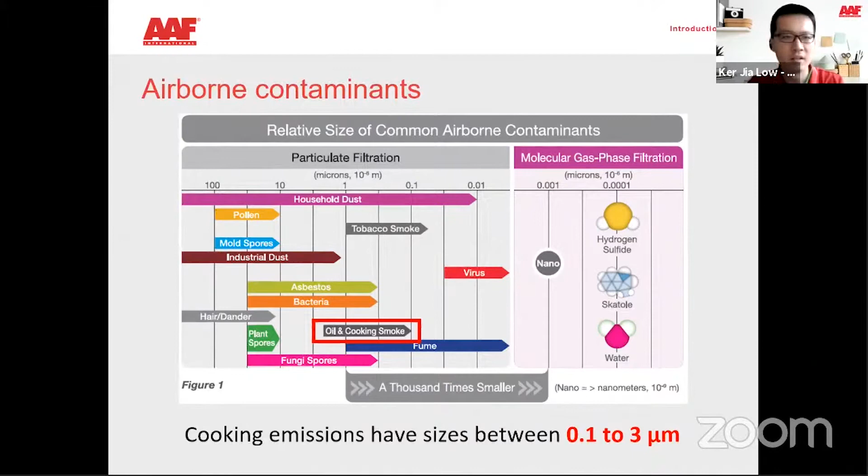So the first thing we want to know about cooking emissions: are cooking emissions harmful? So we can go to the next slide. It is about airborne contaminants. So from here you can see oil and cooking smoke is under a particulate filtration side, and it has a particle size around 0.1 to 3 micrometers. So how will it affect our health? If we look at the WHO guidelines, it says that with a particle size of 0.1 to 3, it is small enough to penetrate deep into the alveoli. Which means it may be able to go into our blood as well, which is harmful to our lungs.

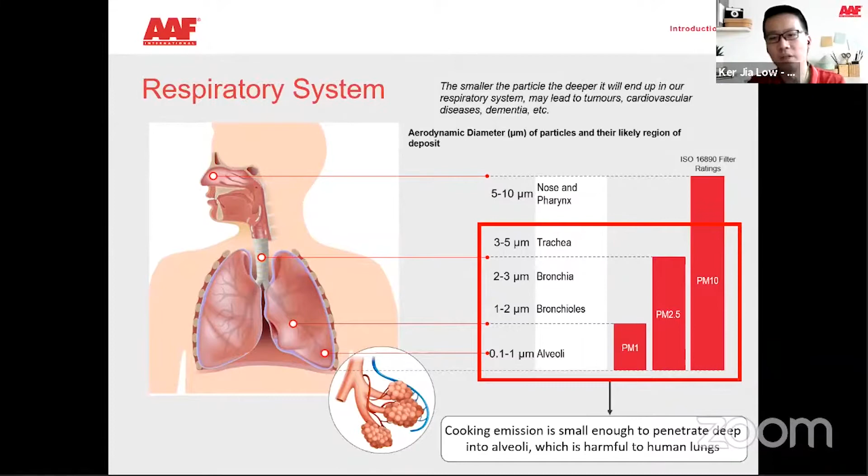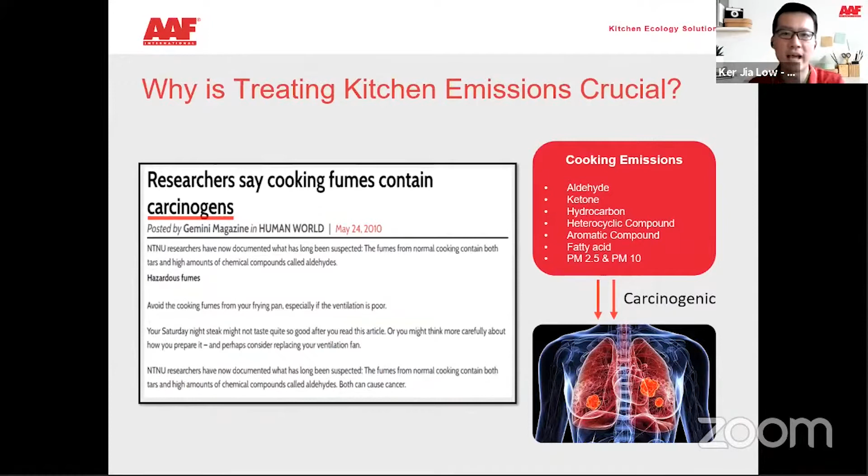And some researchers even say that cooking fume contains carcinogens. This is research done by the NTNU. It's documented that cooking fume normally contains both tar and a high amount of a chemical compound called aldehyde. This kind of chemical contains carcinogens, which means it can easily cause us to have cancer.

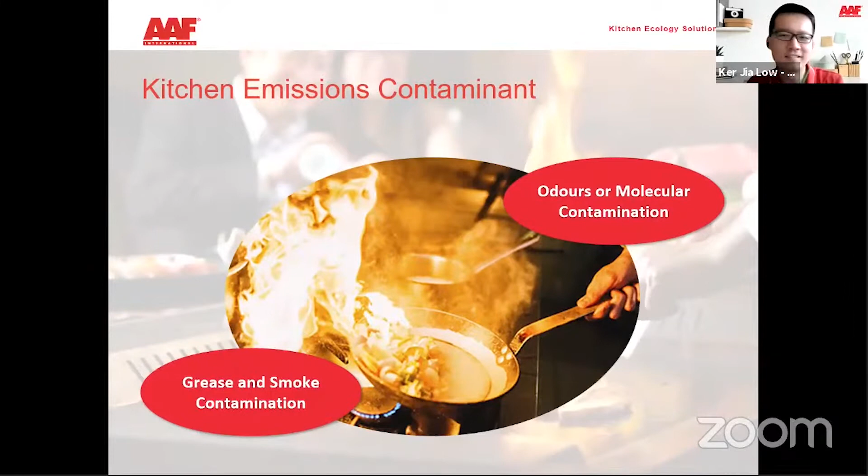So what is the cooking emission contaminant? Basically, kitchen emission contaminants can be separated into 2 categories. The first one is odor, or molecular contamination. The second one is oil grease or smoke contamination. So what do these 2 contaminants affect? The first one is the oil stain. You can see this is a sample of exhaust directly out from the kitchen, so it will leave some oil stain on your wall. This definitely will affect the appearance of the buildings. And if you are using this type of exhaust fan, due to the oil stain on the exhaust fan, it will also affect the lifespan as well.

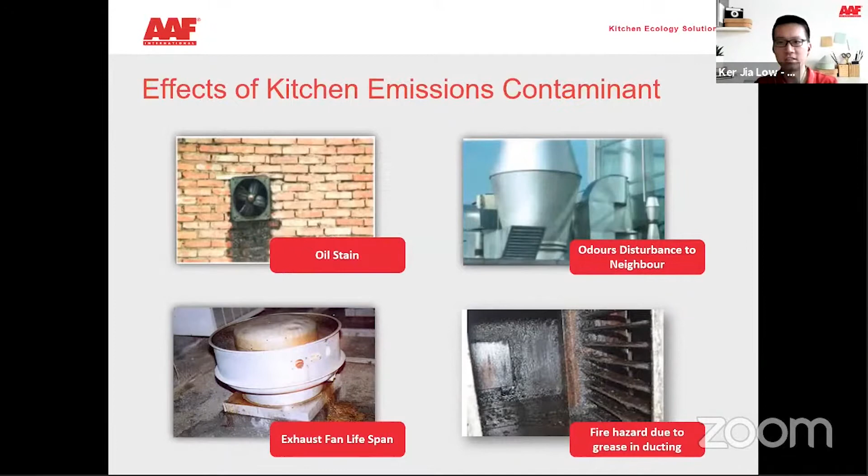So how about the odor? Let's say the kitchen is near a residential area, so definitely it will bring some disturbance to the neighbors as well. So it is also quite important to eliminate it. And of course, the last one is the fire hazard. If we don't have any step to trap the oil mist, your exhaust duct will be full of waste, and this can easily get burned if any fire happens. So fire hazard is also a reason why we should take care of kitchen emission contaminants. So there is a case study of a fire hazard in a kitchen.

So saying that any substance associated with grease will first ignite in half of the cooking fires that begin with cooking material. You can get more information from the NFPA. Over here they also mark their concerns on the grease that's staying in our ducting or even in the kitchen.

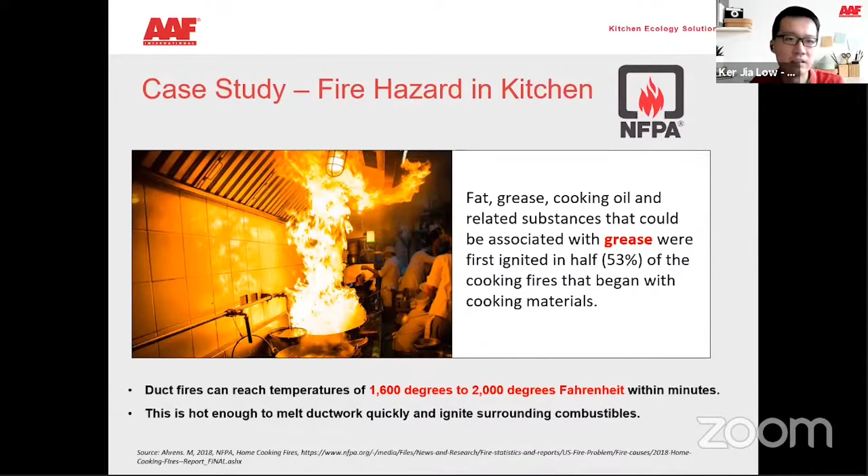Okay. So some of us will say most of the time, like even in fast food or some restaurants, our kitchen already installs a mechanical grease filter. So doesn't it help? This is another study that has been carried out and recorded in the ASHRAE Journal. According to the study, the efficiency of mechanical grease filters in filtering grease is from 5% to 70%.

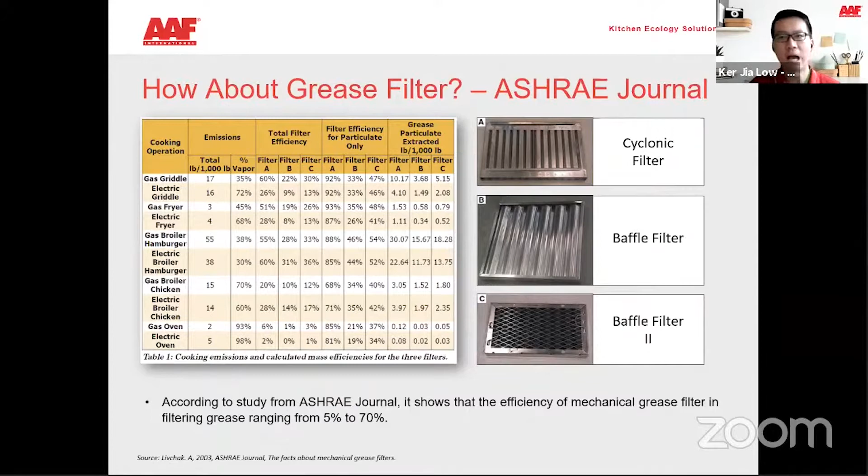So you can imagine a lot of these, they claim cyclonic filters, baffle filters, are around 90% or more than 95%. But because they are placed too near to our kitchen stove, it's not efficient enough to trap all the vapor generated during cooking, like the oil, because if the temperature is so high, it can't be trapped by the mechanical grease filter because it's still in the vapor stage.

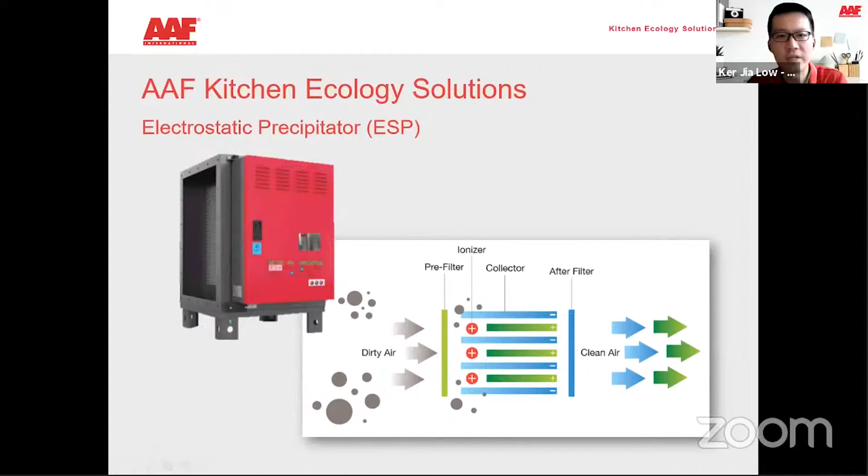Over here, the ionizer will ionize all the oil particles. It will charge them, and then they will be collected by the collector. After this, only clean air comes out. This concept basically uses electrostatics to charge up the oil film and make it easily attracted to the collector.

Okay, so in AAF, we have two models used for grease and smoke removal. The first one is the Q series, we call it MAM ESP Q series. The Q series normally targets small scale restaurants. It is more compact, the average air velocity is 5 meters per second, and the oil removal efficiency is 90%. It's not a modular design. We have targeted various airflows, so according to your airflow, we'll provide you a different model. So this is the Q series model.

Another one is the E1 series model, normally targeted for hotels and shopping malls. This is a modular design, so we are able to cater to higher airflow. Let's say we have 30E1 series, which caters 3000 cmh of airflow. If you have 6000 cmh, we can use two 30E1 series to cater your 6000 cmh. This is what we call modular design, and later we will show more about it.

The air velocity will be from 2 to 2.5 meters per second to 3.5 meters per second. This is because most consultant designs, or tender specs, prefer an air velocity of roughly 2.5 meters per second. That's why the E1 series is more suitable for your tender projects or consultant designs. The efficiency is also higher than the Q series; the oil removal efficiency can go up to 95%.

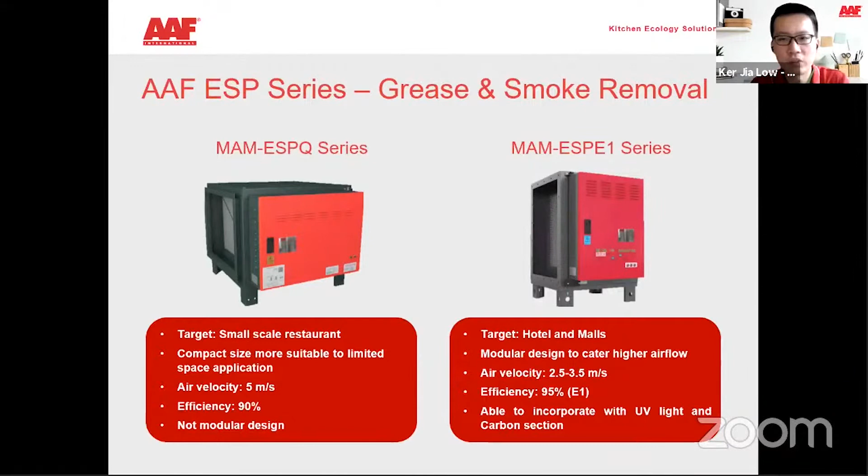So we go to the ESP configuration next. Normally we call this one a single pass. For this ESP configuration, we will focus more on the E1 series. For example, right now your target airflow is 3000 cmh. If you just want to target 3000 cmh, you can definitely use a 30E1 series.

Let's say, for example, you're targeting a 6000 cmh airflow. You can stack 2 units of 30E1 series together. But if you're using these 2 units stacked vertically, the efficiency actually remains unchanged, still 95%, but with a higher airflow. So if you want to increase your efficiency, you can consider what we call double

pass ESP configurations. This double pass ESP configuration will increase the resistance of the ESP itself, but it will improve the efficiency from 95% up to 99.75%. So this configuration is actually quite good and is recommended if

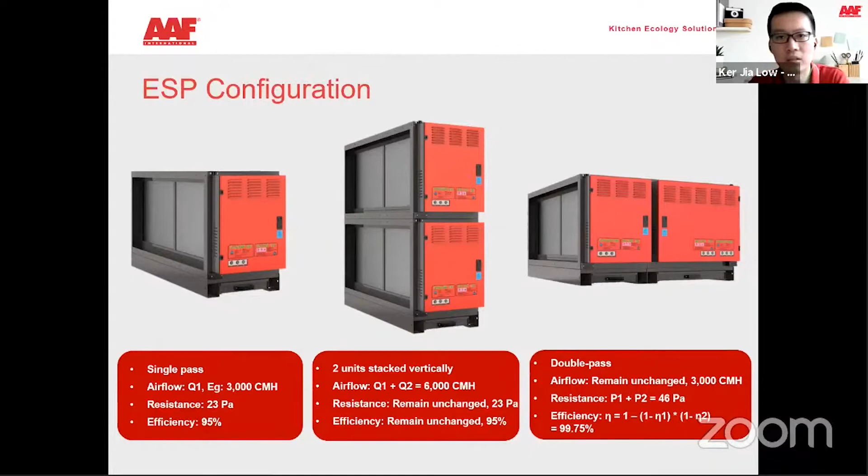you are targeting a fast food chain, for example McDonald's or Burger King, because this type of fast food chain generates a lot of oil smoke or oil fumes. So 99.75% is a good one to prevent any oil emissions or fume emissions going to your pedestrian street or outside your building, leaving oil stains and all these kinds of things.

Okay. So the next one we will go to is odor removal. If you still remember the kitchen emissions, we face 2 contaminants. The first one is the smoke and oil film. The second one is the odor. So if you need to remove the odor from your kitchen emissions, you might consider the E1 series incorporated with the UV series or CB series.

So right now we are going into the UV series first. The UV series also has a modular design with the E1 series, so it can incorporate with the ESP E1 series. It has an odor removal of more than 90%. So how does it actually remove the odor? The first thing is it generates ozone.

This ozone is a non-flammable gas. It requires 2 to 3 seconds of contact time to react with the odor that is released, so that it can remove the odor generated during your cooking stage. So this is one way of odor removal, the UV series. Typically people prefer the UV series more than the carbon series.

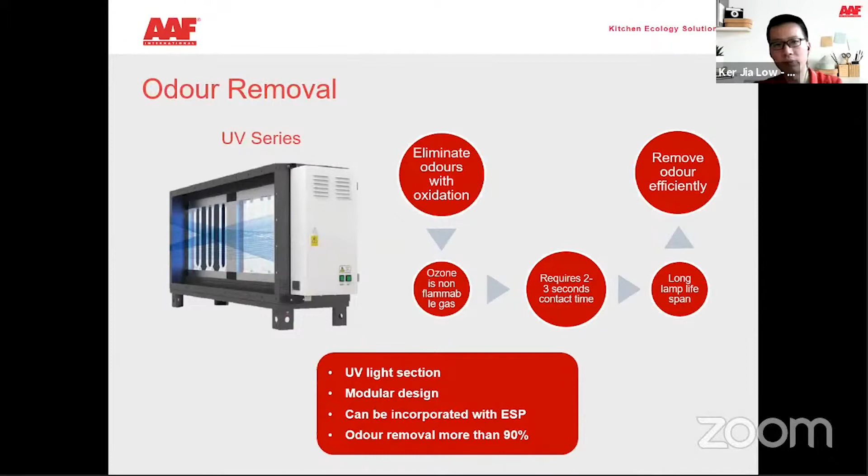The main reason is if we are using a 95% oil film removal rate, there will still be a possible 5% of oil film released into the environment. So if we are using carbon behind the E1 series ESP, that 5% of the oil film will easily stick on the carbon. So it will increase the carbon pressure drop dramatically and also reduce the carbon lifespan.

So now we're going into the carbon series. This is the carbon series we talked about just now, the activated carbon sections. Inside is a carbon pellet filled with activated carbon. It's the same as the UV series: it's a modular design, and it can also incorporate with the ESP series. The odor removal rate is also around 90%.

But the problem is, like I said just now, if you are going to use a carbon series to remove the odor, the first thing you must be very careful about is the oil removal efficiency. So instead of using 95%, maybe what you need is a double pass, to increase the oil removal efficiency to around 99%, so that this will prolong your carbon series lifespan.

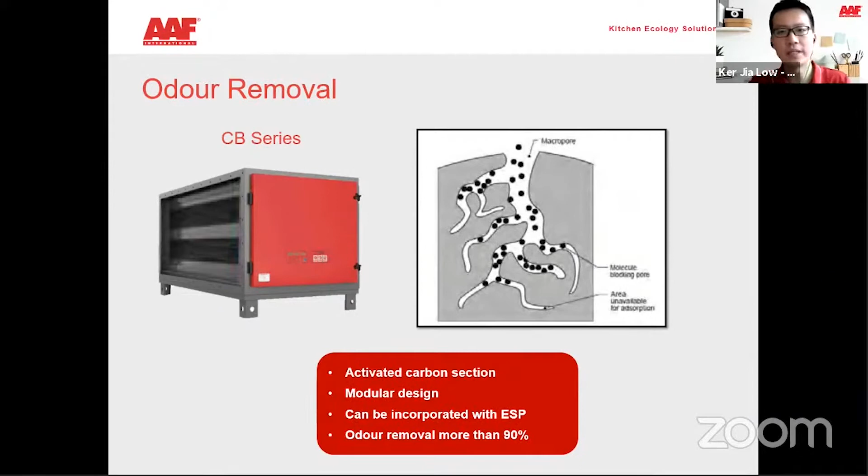So we can go to the next one. The next one is the AAF Kitchen Ecology Solutions. This is basically how it's going to be installed at site. The first stage is the oil remover; the first stage, I would say, is the pre-filter.

The pre-filter is a kind of mechanical filter that we saw just now. Normally this one can be installed at your kitchen hood, or you can also install it just before the ESP. It's a grease, oil, and moisture separator. The second and the third stage will be an electrostatic precipitator.

Q series or E1 series depends on your application. Double pass is optional. If you are considering using a carbon filter, I would definitely suggest the double pass configuration, because this ensures only limited oil film passes through the ESP and sticks on your activated carbon.

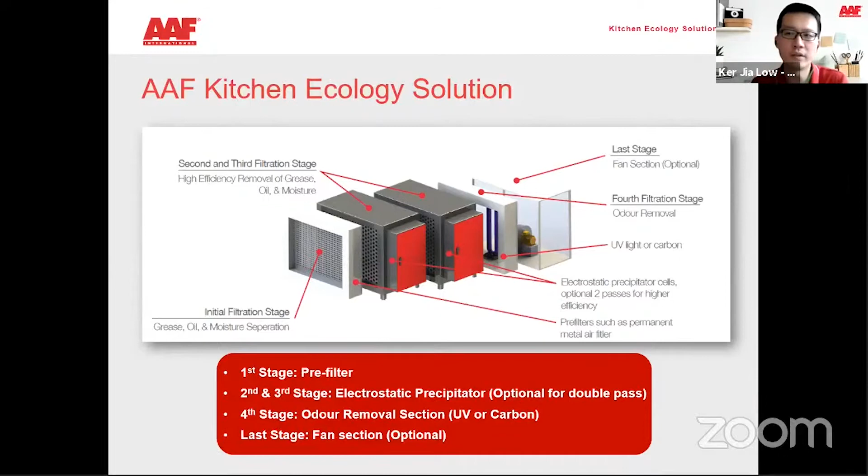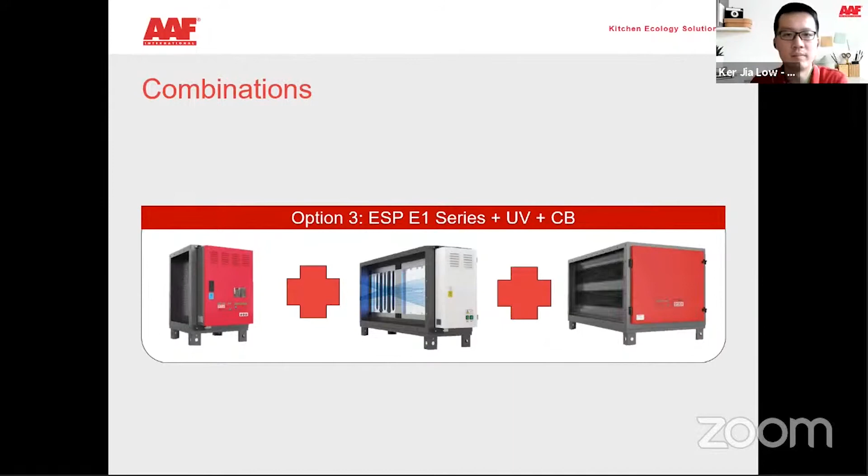So what combination can be useful for the E1 series? If you are more concerned about UV for odor removal, what you can do is put an E1 series ESP in front, then add a UV, and then add on a carbon series. This combination can have quite efficient odor removal efficiency.

The second combination is another product. Just now we said it's Q series, E1 series. This is another series for a more economical way to do it - the E1C series, where C stands for combination. By using this E1 combination series, it already includes a UV inside and carbon as an optional.

This one is also the same - we normally target it for hotels and malls, most probably for consultant design and tender spec, 2.5 to 3.5 meters per second. The efficiency for oil film removal or oil mist removal is around 95%. It's built in with UV light already, and carbon as an optional - you can choose either a honeycomb carbon, a carbon tray, or MAC carbon, which is kind of like a pleated filter.

So we already know the spec or model that AAF provides. ESP Q series is most probably for small scale restaurants. E1 series is for tender spec, and E1C series is also for tender spec. The difference between E1 and E1C series is that E1C series is a combination - one unit already includes a UV and a slot for us to put in a carbon filter.

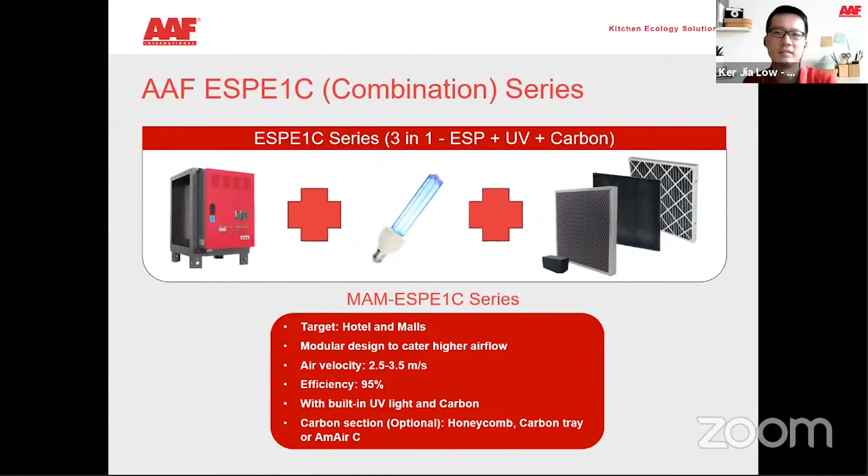Other than that, AAF ESP products have compliance to ASHRAE and EN. For ASHRAE, we tested it by ASHRAE 52.2, and for EN 779, we also tested it under EN 779 particle test. It has a 95% efficiency at 500 FPM, that means the speed. You can refer to the diagram over here.

This is for the resistance and this is for the efficiency. For the line, you see 500 FPM is around here, so it's around 95%. If you still remember, we said it's 0.1 to 3 micrometers, so the efficiency is around 95%.

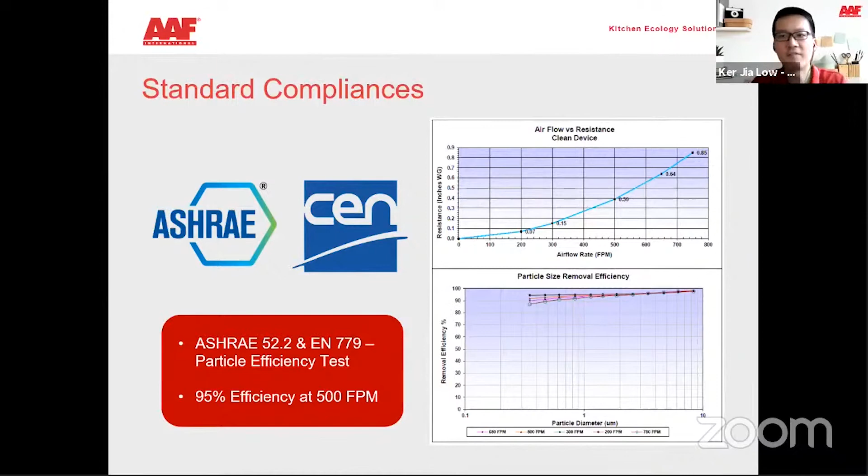Other than that, AAF ESP also has safety compliances. We have CE compliance, which is electrical integrity built into European compliance, for machine safety and quality. UL 867, we are still applying for this one, so it's still in progress - it's actually a safety standard for electronic air cleaners. Other than that, we are also compliant to IP55, which is normally a physical resistance and water resistant standard - it's an IP enclosure rating and standard.

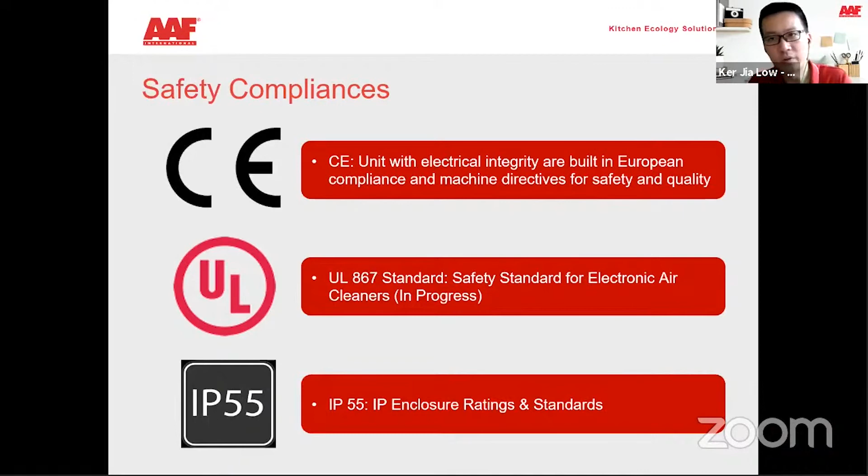Understanding all this, we will go to the next one, because maybe some people are still not familiar with how we are going to design an ESP airflow. So this is some of the rule of thumb applied in Malaysia. Let's say for light smoke, maybe some noodle shop, like a breakfast store or a solid breakfast restaurant, they only generate some light smoke.

Using a rule of thumb, we use 2000 cmh per stove. For a regular cooking restaurant or seafood, maybe per stove we need to use 3000 cmh. If it's very heavy cooking with oil, or it will generate heavy smoke, we go to 4000 cmh per stove. So this is how we calculate it using the rule of thumb.

Another way to calculate it is based on the hood surface. Normally the air velocity for the hood surface will be 0.5 meter per second. So if the hood surface area is 2.4 meter square, we just times it with 0.5 meter per second, then we can calculate the airflow that we need.

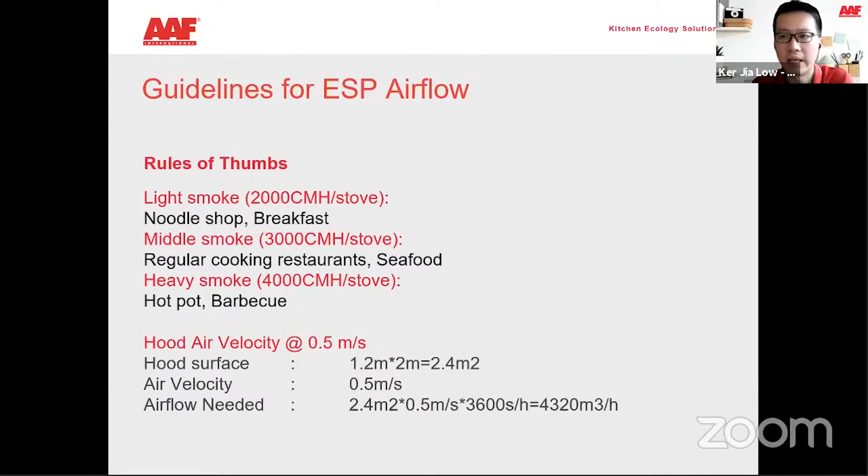For the ESP installation, there are also some design guidelines that need to be considered, because it's good for us to have an ESP, but if we install or design it improperly, it may not be able to perform as it's supposed to. So we promote having an even airflow distribution, because this can provide better efficiency and performance. This is the correct way for us to install.

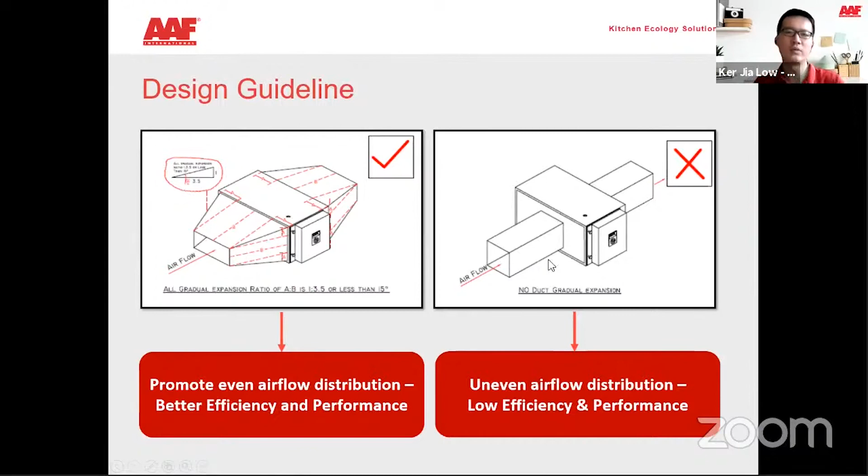So the duct may need something like a reducer after it, and something similar before it. If we are using just a normal duct, definitely it won't provide us an even airflow, and this will affect the ESP performance and its efficiency as well.

So these are some airflow distributions that we calculated using CFD. You can see there is an uneven airflow and distribution which generates low efficiency, because even though we have this duct, it still has some angle to it. So the most suitable approach is to not install directly after the bending of the ducting.

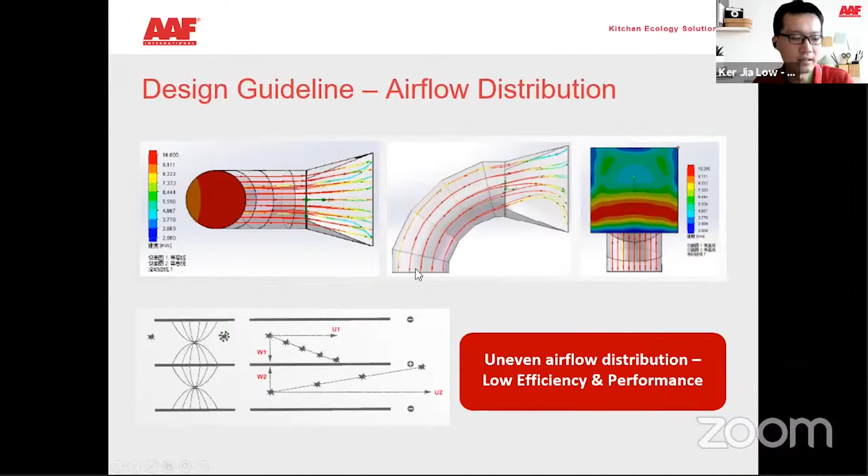Normally what we recommend is a 1.5 diameter arc radius elbow. So wherever we bend the duct, we will need some space for it to stabilize the airflow, otherwise it will be a turbulent airflow. From here, it can make the airflow more evenly distributed before entering the ESP.

If after this you still have a little bit of 4 times equivalent diameter duct, of course it can generate even better airflow distribution before entering the ESP. This is very crucial because it will directly affect the ESP performance.

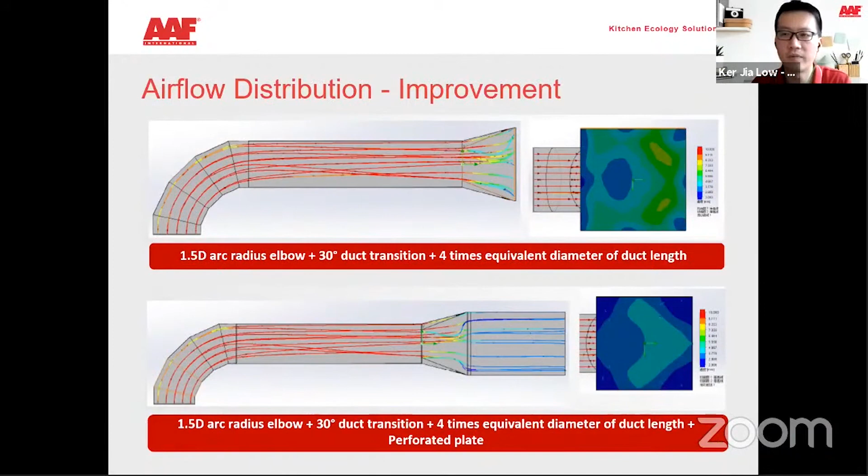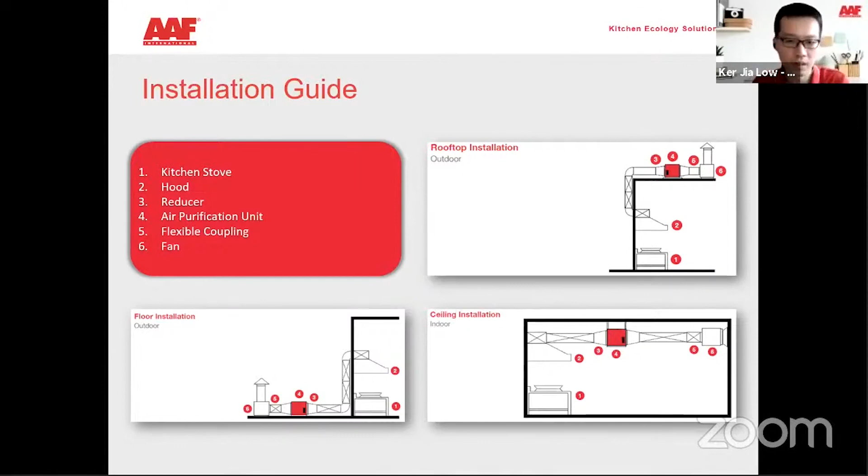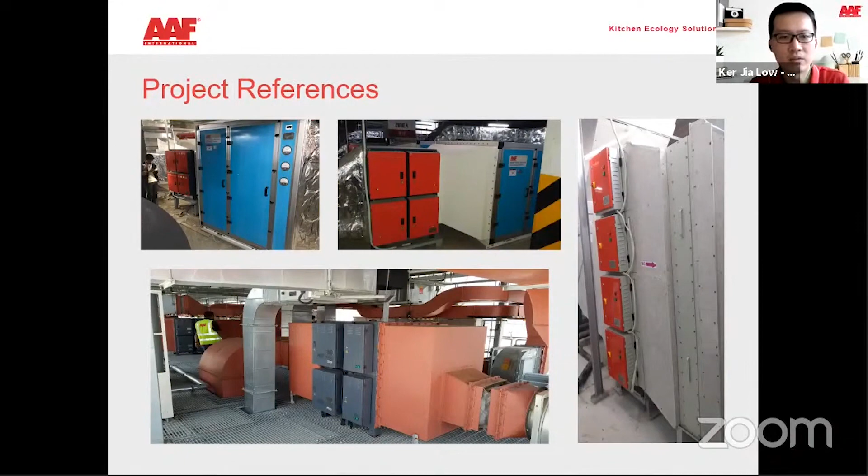The next slide shows a project reference, this is how they installed at site. So they have it after that. Some people are using AAF SAAF to remove the odor - this is an example, and this is also a way that people install at site.

So installation is a crucial part for us in taking care of our environment, to remove the oil mist, the grease, and also the odor, so that we don't disturb our neighbors or our environment.

After installation, all of the equipment must have maintenance. For AAF ESP, we recommend on-site cleaning every 2 months. This is to avoid the grease becoming hardened if we don't take care of our collector cells for too long - these are the collector cells we refer to. If it already becomes hardened on the collector cell, it will be very hard for us to clear it off, and this will definitely reduce the efficiency of the ESP itself.

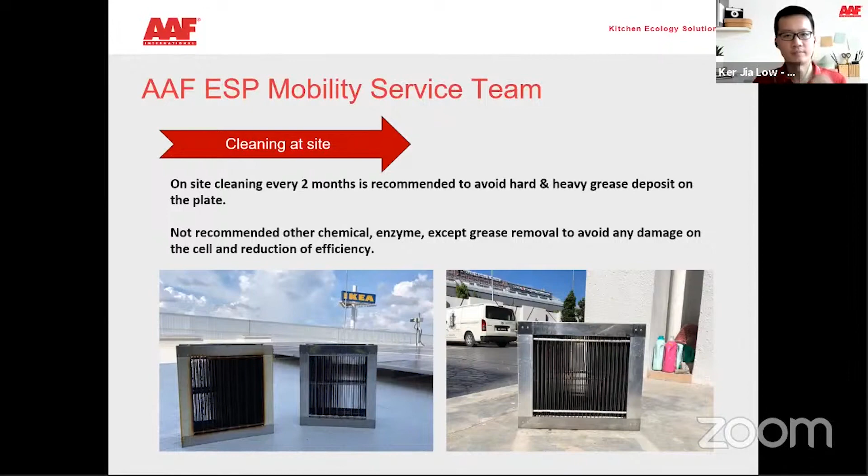Thank you, basically this is my presentation.